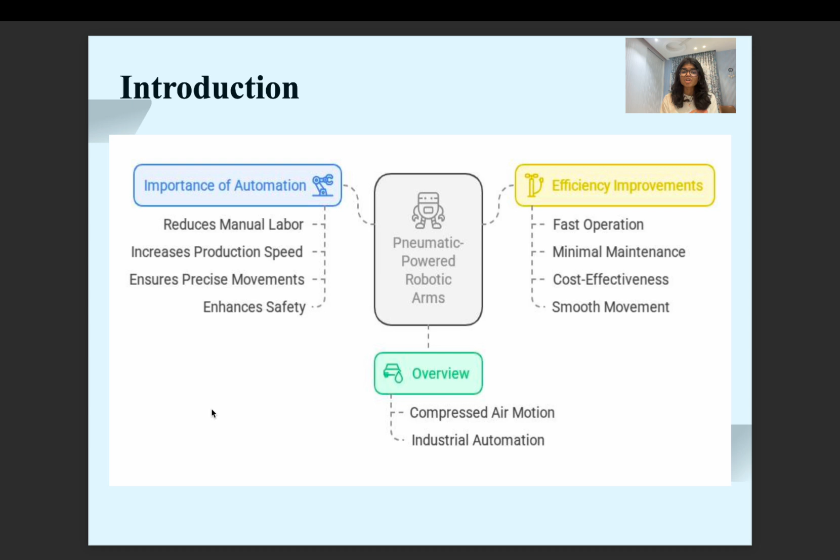Project objective: the purpose of this project is to explore how pneumatic systems work and how they can be applied in industrial automation. One key goal is to understand how compressed air can be used to control movements in a robotic arm. Another important aspect is to study the gripper mechanism, which is responsible for securely picking up and placing objects. By developing this system, we aim to create an efficient and reliable automation process usable in various industries. This project also helps us learn about robotic arm movements, air pressure control, and the importance of automation in material handling.

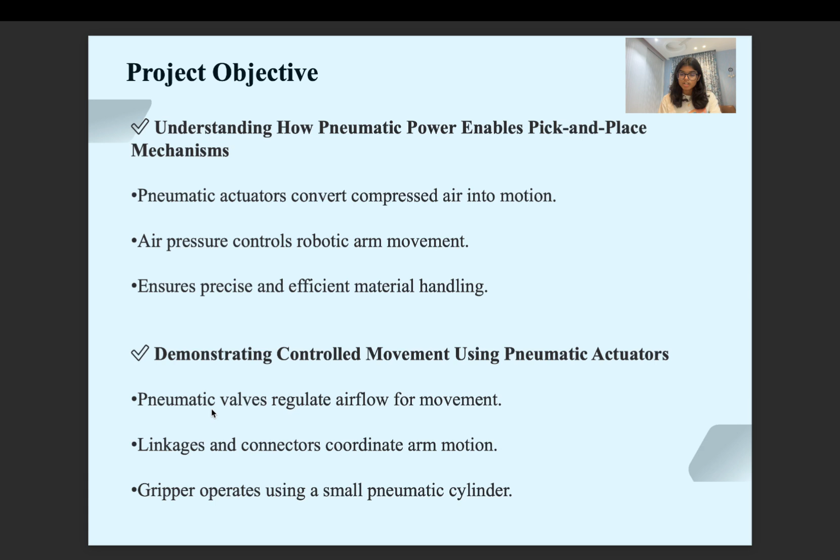Working principle: the pneumatic pick and place arm operates based on the principle of compressed air pressure. When air is supplied to the system, it flows into different actuators and cylinders, creating movement. The pneumatic actuators convert this air pressure into mechanical motion, allowing the arm to move in a controlled manner. Directional control valves regulate the direction in which the air flows, ensuring that the robotic arm moves precisely.

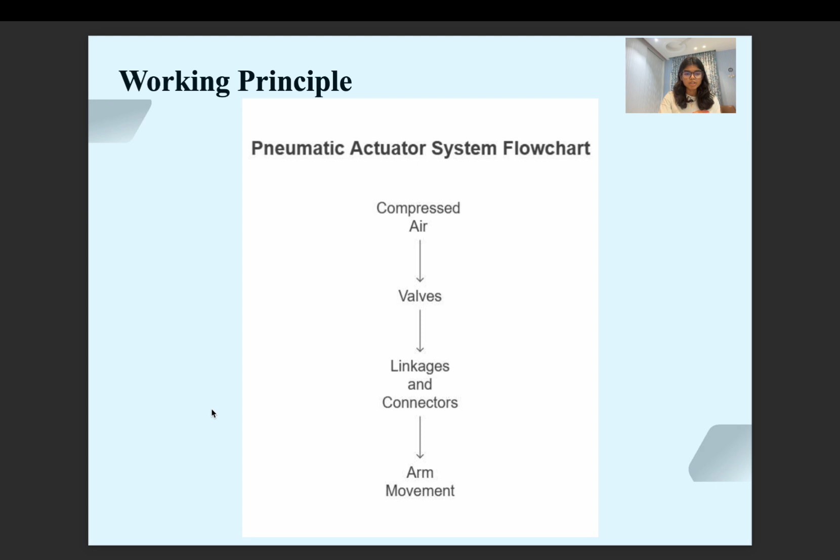The gripper, attached to the robotic arm, opens and closes based on air pressure changes. When air is supplied, the gripper closes to hold an object, and when air is released, the gripper opens to drop the object. The principle is similar to how we inflate and deflate a balloon: when air is pumped in, it expands, and when air is released, it shrinks.

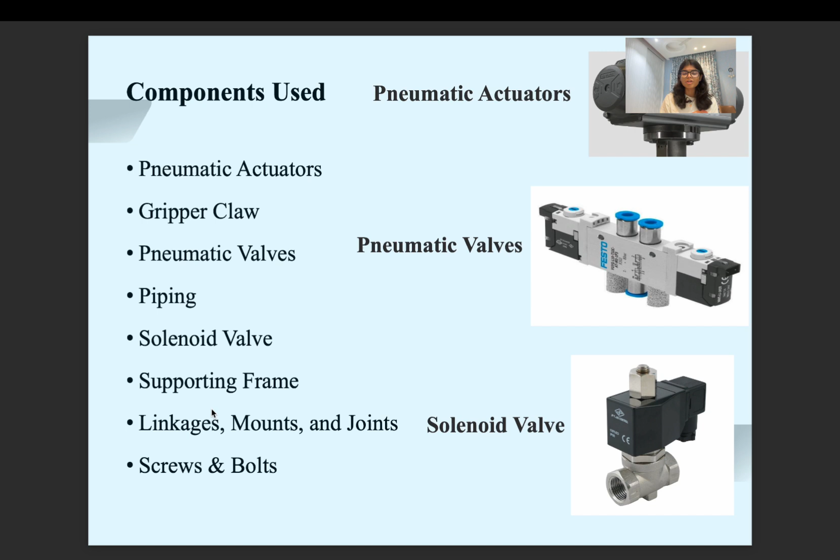Components used: the pneumatic pick and place arm consists of several important components that work together. The pneumatic actuators are responsible for moving the arm in different directions. The gripper mechanism is used to securely hold and release objects. To regulate airflow, pneumatic valves are used, which control how much air enters the system and in which direction it flows. A solenoid valve, an electrically controlled valve, is used for automated operation. Finally, the entire system is connected using pipes and connectors that distribute compressed air to different parts of the robotic arm. These components must work in perfect coordination to ensure the system operates smoothly and efficiently.

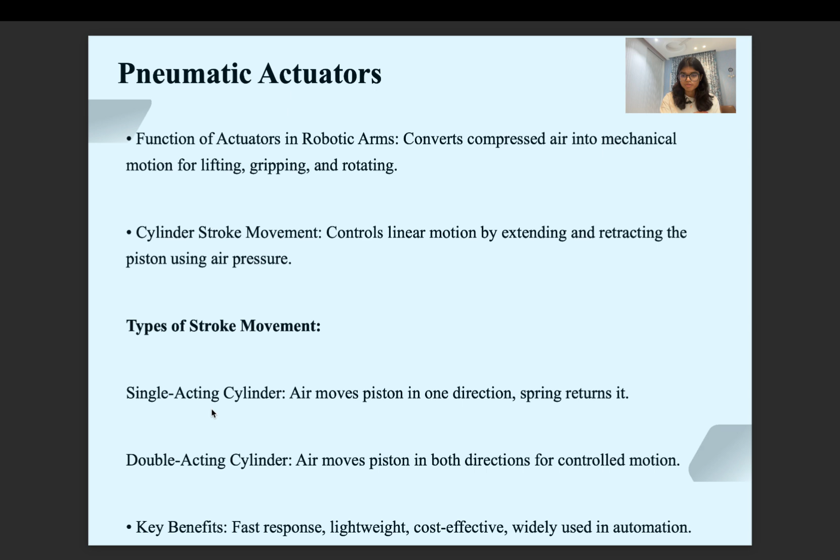Pneumatic actuators: a pneumatic actuator is a mechanical device that moves when compressed air is applied. It is one of the most important components in the system because it allows the robotic arm to move. There are two main types of pneumatic actuators. The single acting cylinder uses air pressure to move the piston in one direction, and a spring returns the piston to its original position. The double acting cylinder uses air pressure in both directions, making it more efficient and powerful. The working principle is simple: when compressed air is supplied, the piston moves forward, and when air is released, the piston moves back. This controlled movement allows the robotic arm to perform precise pick and place operations.

Pneumatic valves are used to control and direct the flow of compressed air in the system. These valves act as switches, deciding when and where the air should flow. There are different types of valves, each serving a specific purpose.

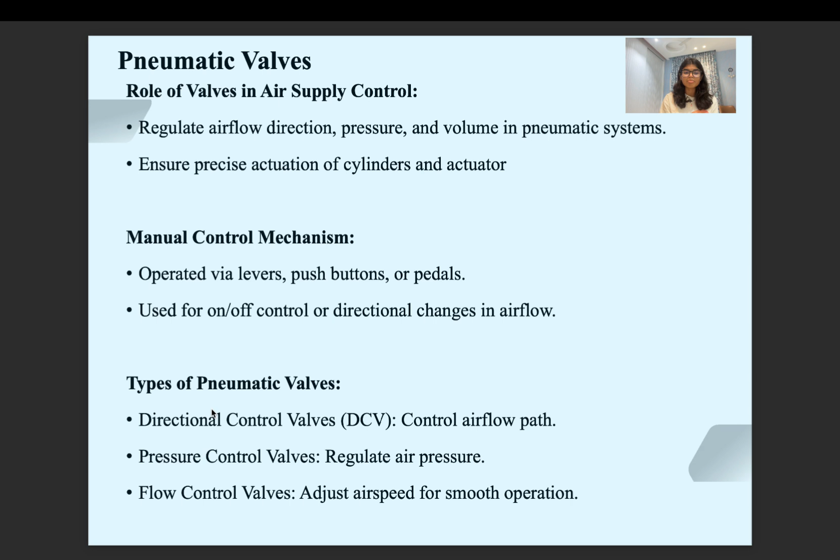Directional control valves help in controlling the movement of the robotic arm by determining which way the air should flow. Pressure control valves ensure that the correct amount of air pressure is maintained in the system. Flow control valves adjust the speed of movement by regulating how quickly air enters and exits the system. Some pneumatic valves are operated manually using buttons or levers, while others are automated and controlled by electrically operated solenoid valves.

Gripper mechanism: The gripper is a crucial part of the pneumatic pick and place arm. It is responsible for grasping and releasing objects during an operation. A small pneumatic cylinder is used to control the gripper's movement. When compressed air is supplied to the cylinder, the gripper closes tightly around the object, holding it securely. When air is released, the gripper opens, allowing the object to be placed at the desired location. The entire process is controlled using a directional pneumatic valve, which ensures that the gripper functions accurately.

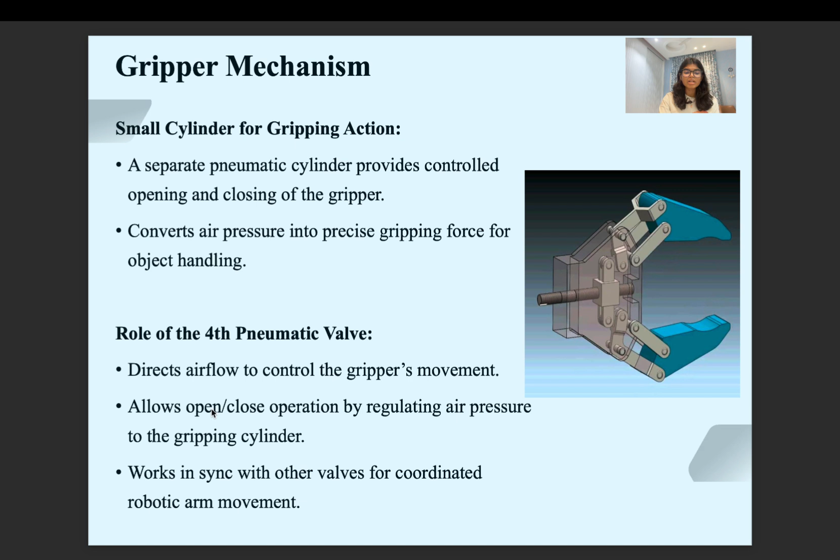The working of the gripper can be compared to a clothespin. When you press it, it holds an object, and when you release it, it opens.

System assembly: The assembly of the pneumatic arm involves connecting different components in a structured manner. The actuators, grippers, and valves must be properly aligned to ensure smooth operations. The linkages and connector rods play an important role in transmitting force and motion between components. If the system is not assembled correctly, it can lead to misalignment, reduced efficiency, or mechanical failure. A properly assembled pneumatic arm can operate with high precision, making it useful in industrial automation applications.

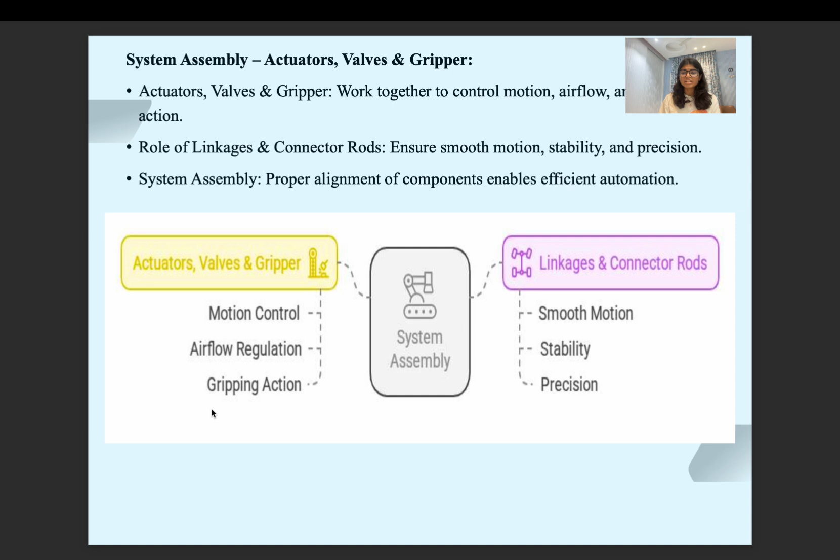Control mechanism: The pneumatic pick and place system is controlled manually using pneumatic valves which regulate the airflow and pressure within the system. Directional control valves determine the movement of the robotic arm, while flow control valves regulate speed. Pressure control valves ensure that the system operates at the correct air pressure. These controls allow for precise and smooth movements, making the system reliable in industrial environments.

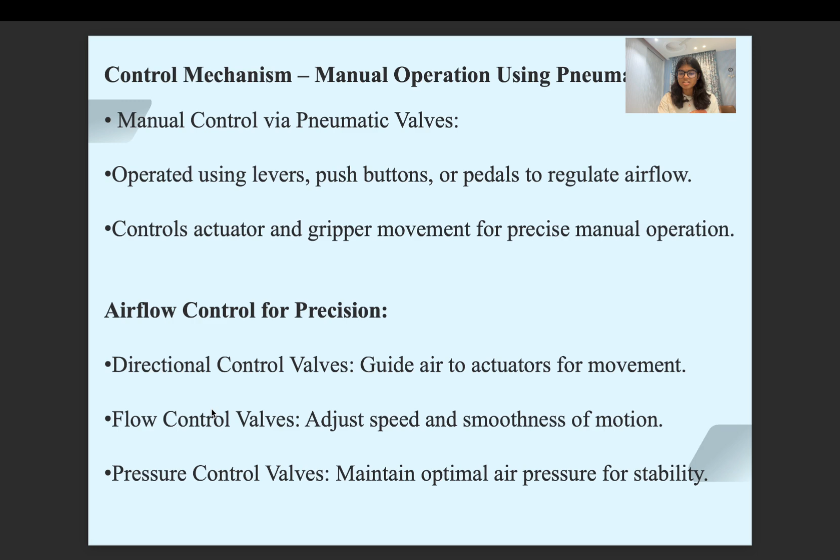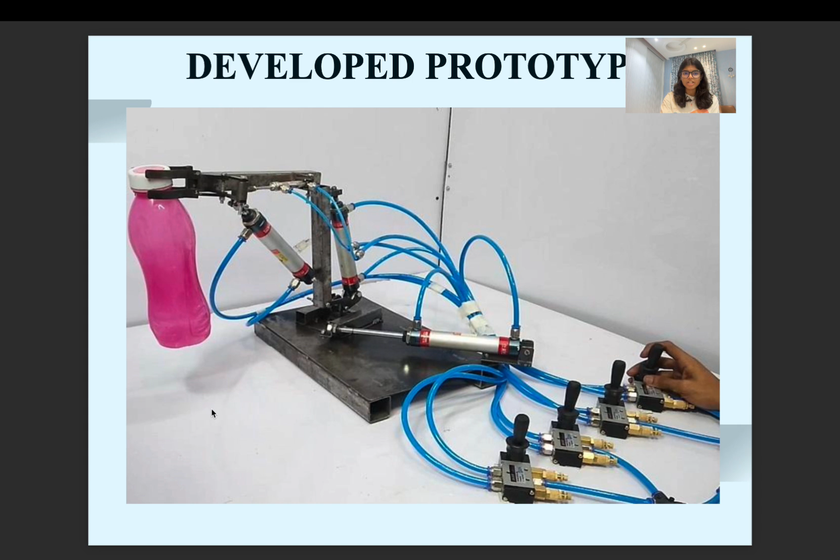Develop prototype: A prototype of the pneumatic pick and place arm was built to test its functionality. The prototype successfully demonstrated gripper control, actuator movement, and airflow regulation. This working model provides an insight into how industrial automation systems function. It can be used in various real-world applications such as assembly lines, packaging industries, and material handling units.

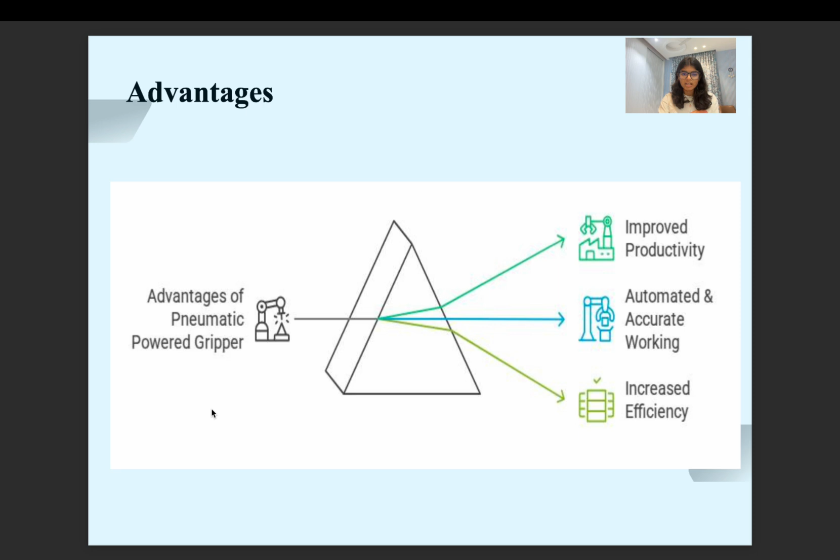Advantages of pneumatic pick and place arm: The arm has several advantages. It is fast and reliable as air-powered systems respond quickly to commands. It is also cost-effective since pneumatic components are generally cheaper than electrical and hydraulic systems. Another major advantage is energy efficiency, as the system operates using compressed air, reducing electricity consumption. Additionally, it requires minimal maintenance as it has fewer moving parts and a simple design.

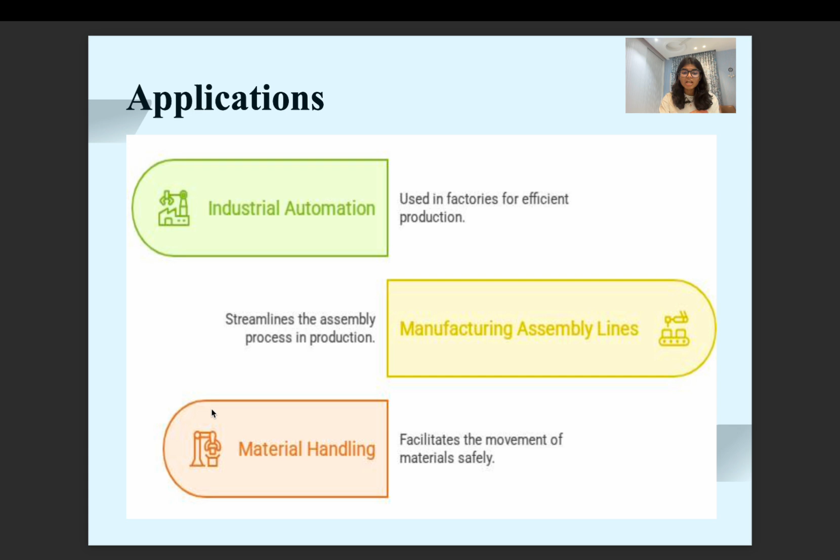Application of pneumatic system: Pneumatic systems are widely used in industries such as manufacturing, robotics, and medical equipment handling. In industrial automation, they are used in assembly lines, packaging systems, and material sorting machines. In the medical field, pneumatic systems help in the handling of delicate surgical instruments. They are also used in robotics for performing repetitive tasks with high precision.

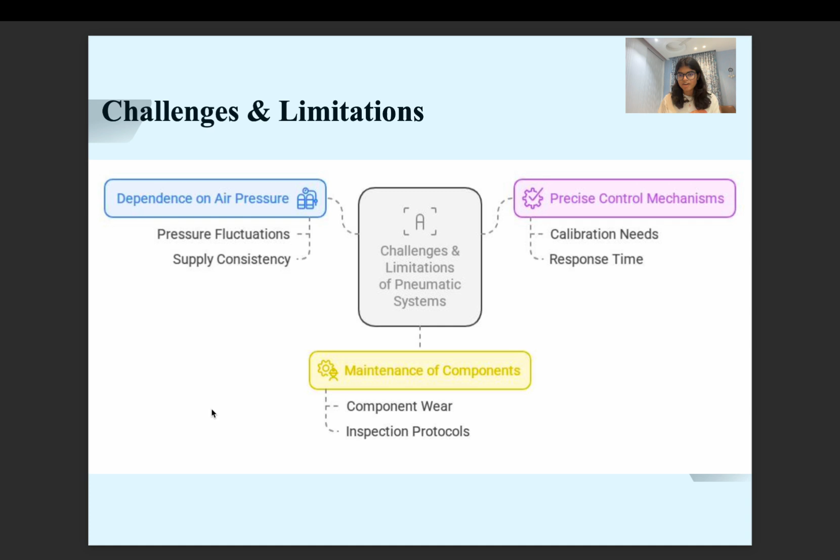Challenges and limitations: Despite its advantages, the pneumatic pick and place arm has some challenges. The system requires a stable air pressure supply which will not always be available. It also requires regular maintenance as valves and actuators can wear out over time. One limitation is that pneumatic systems cannot generate very high forces, which means they may not be suitable for lifting very heavy objects. Additionally, air leaks can reduce efficiency and affect the performance of the system.

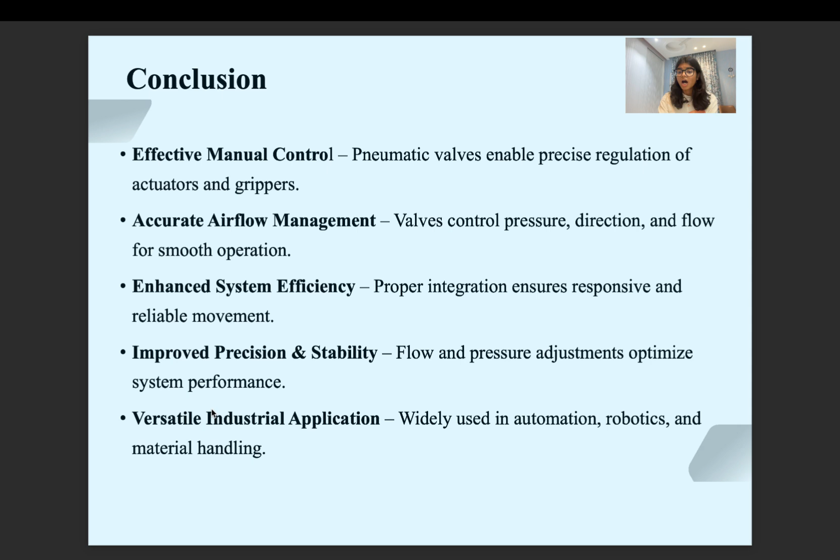Conclusion: The pneumatic pick and place arm is a highly efficient automation system that uses compressed air to control movements. It is widely used in industries for material handling, sorting, and assembly tasks. The system is cost effective, energy efficient, and reliable. However, proper maintenance and assembly are necessary for optimal performance.